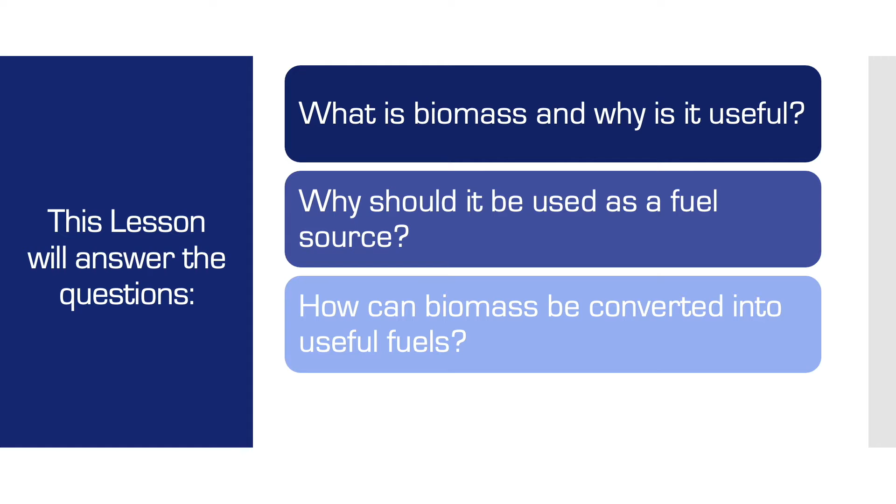This lesson will answer the questions: what is biomass and why is it useful? Why should it be used as a fuel source? And how can biomass be converted into useful fuels? Biochemical processes and thermal processes.

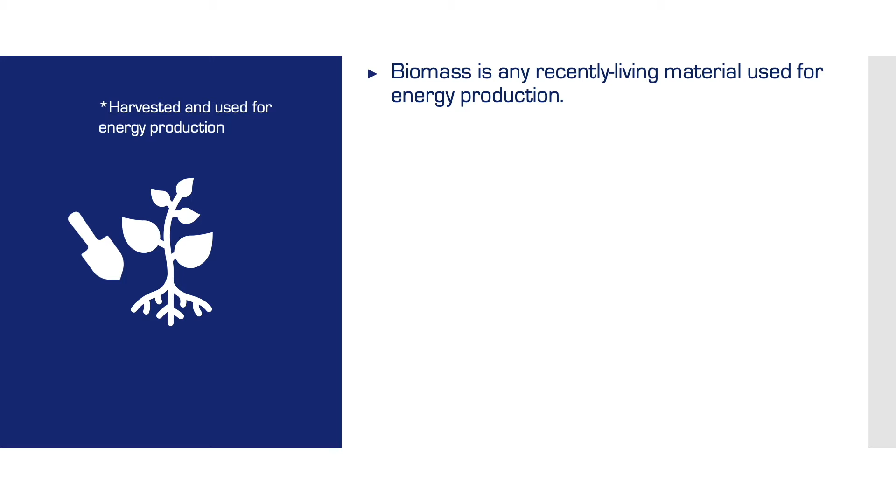So what is biomass and why is it useful? Biomass is any recently living material used for energy production. Biomass is considered a renewable resource.

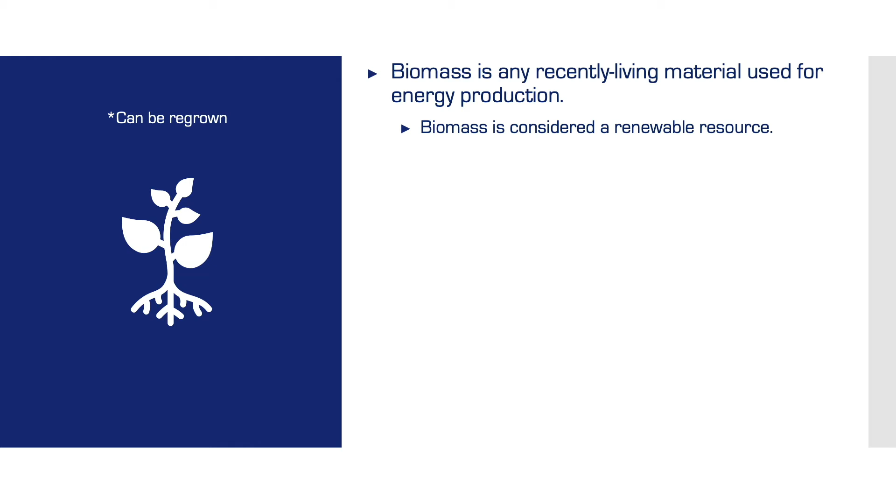Although fossil fuels come from once living sources, they are not considered biomass. This is because naturally occurring geological processes are needed to convert the ancient material into fossil fuels. Importantly, these processes are so slow that fossil fuels are not considered renewable.

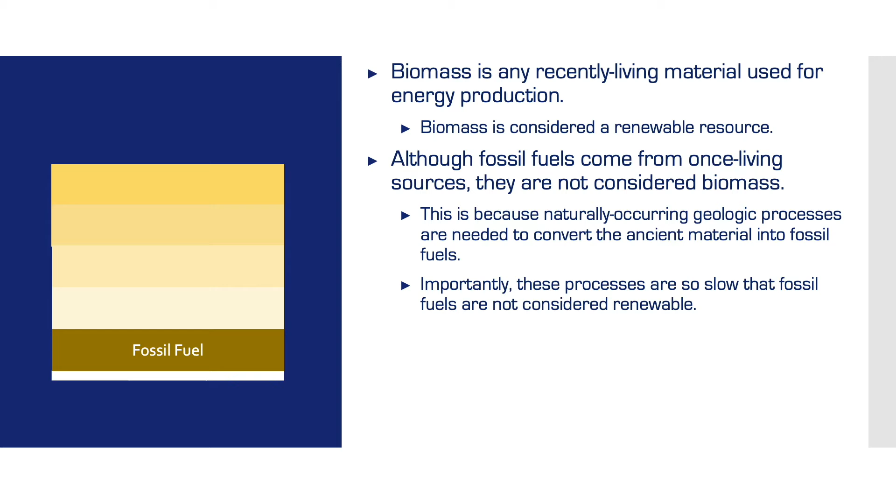Ultimately, biomass is a form of energy storage. Plants convert solar energy into chemical energy via photosynthesis. We can then convert that chemical energy into useful fuels.

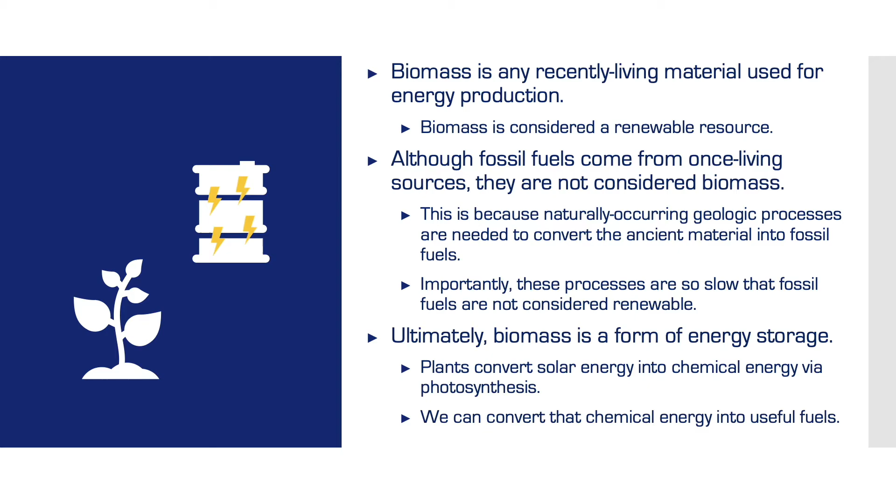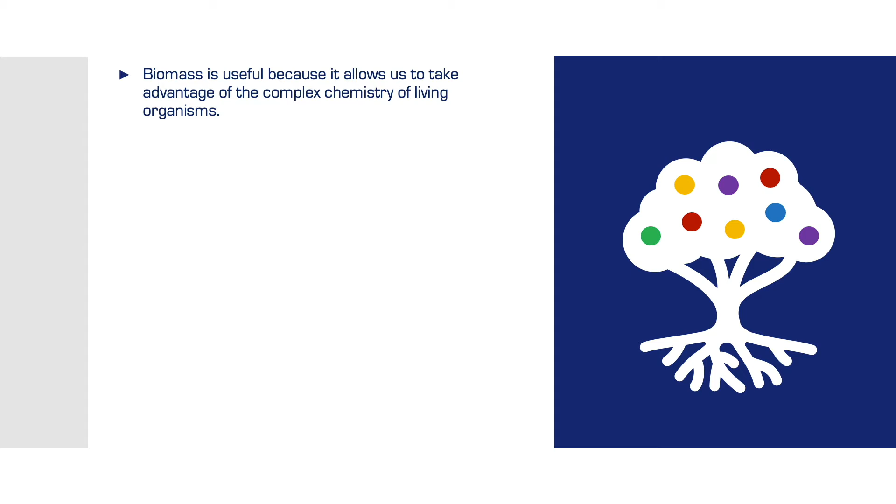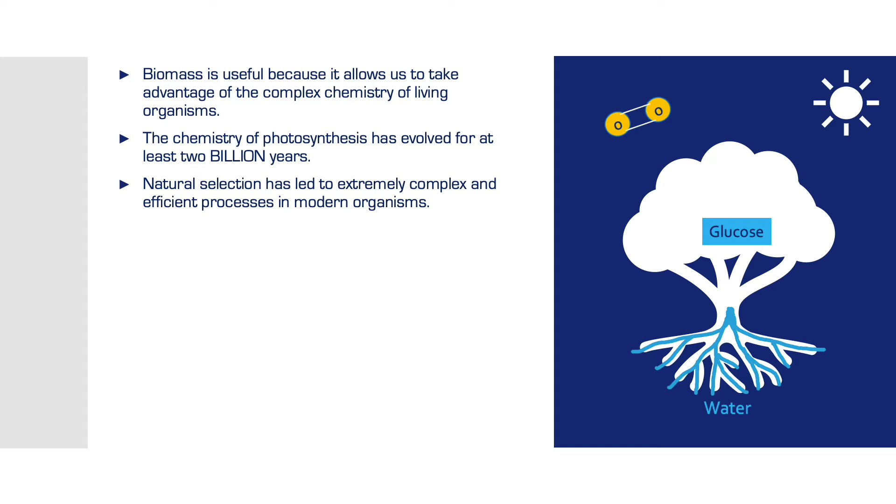Why should it be used as a fuel source? Biomass is useful because it allows us to take advantage of the complex chemistry of living organisms. The chemistry of photosynthesis has evolved for at least 2 billion years. Natural selection has led to extremely complex and efficient processes in modern organisms.

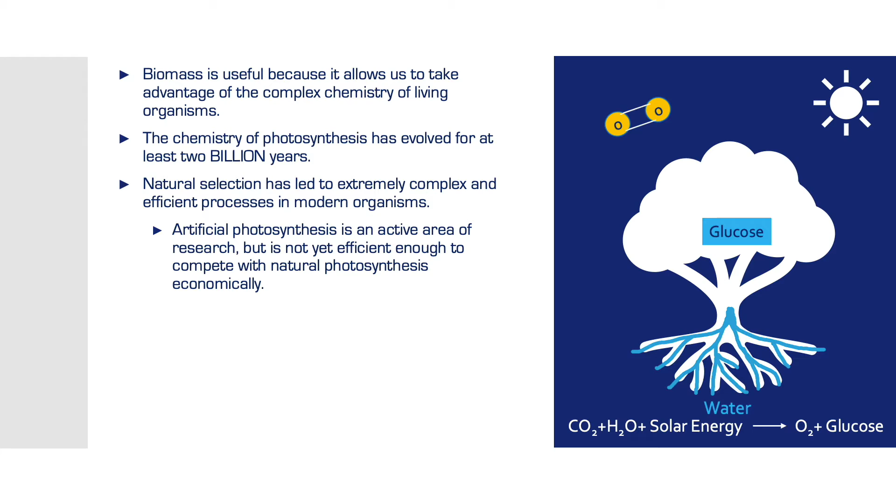Artificial photosynthesis is an active area of research, but is not yet efficient enough to compete with natural photosynthesis economically.

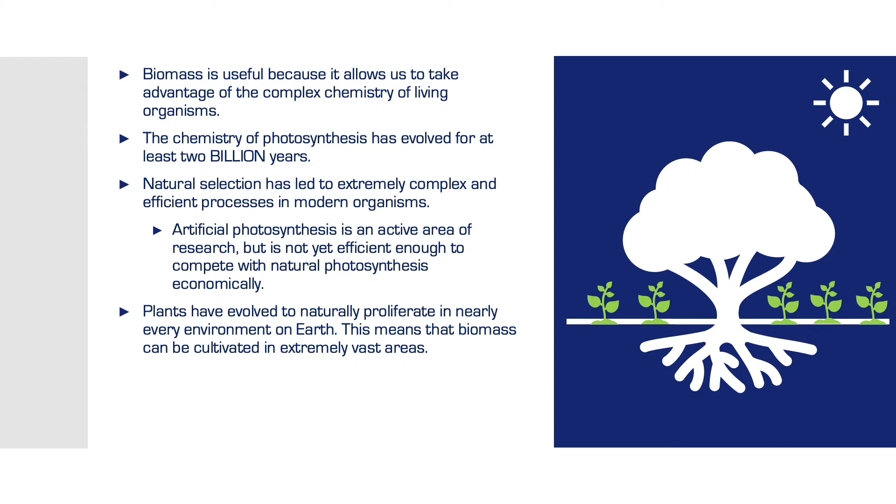Plants have evolved to naturally proliferate in nearly every environment on Earth. This means that biomass can be cultivated in extremely vast areas. The wide variety of plant life on Earth gives us a broad selection of plants to choose from to optimize the chemical composition of biomass.

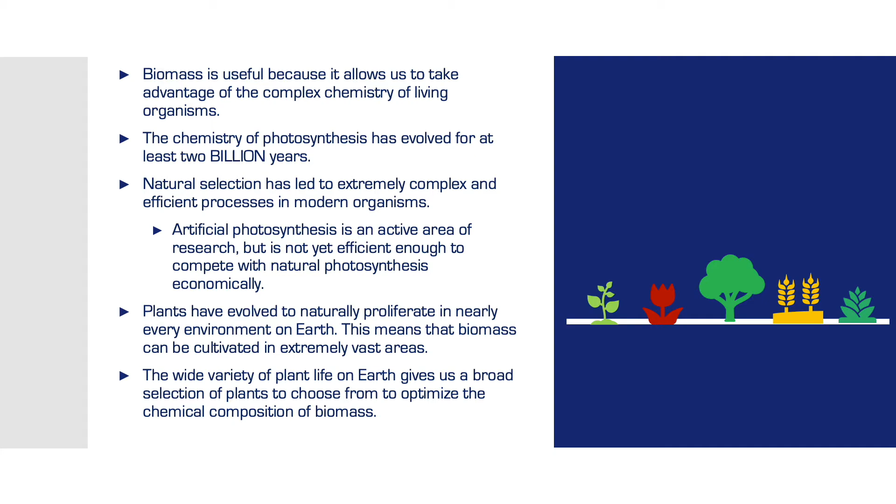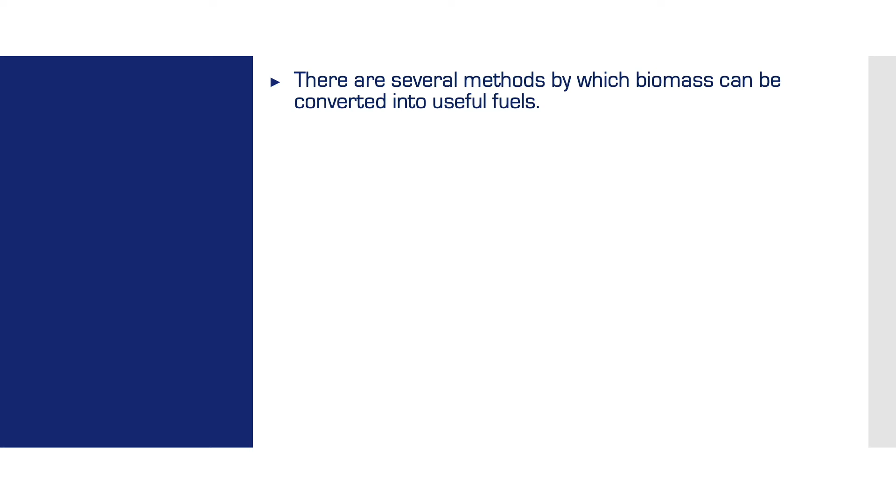So how can biomass be converted to useful fuels? There are several methods by which biomass can be converted into useful fuels. The simplest method is the oldest method: simply burn the biomass.

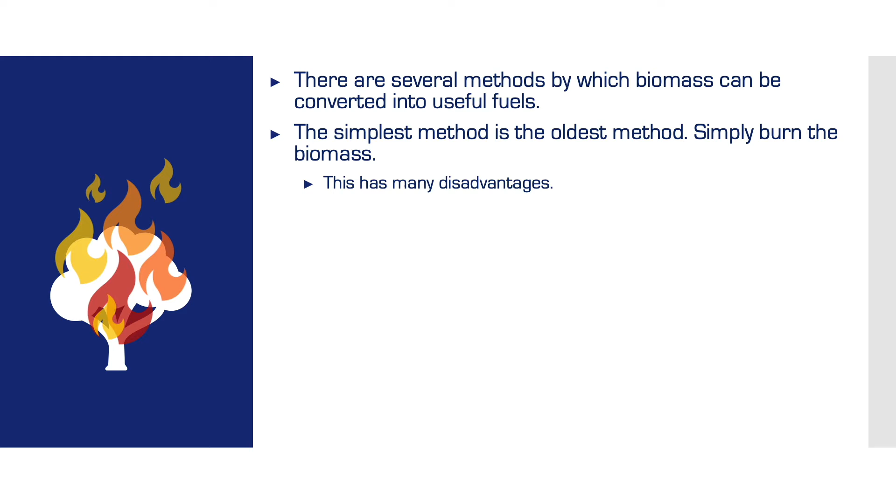This has many disadvantages. Biomass is a complex mixture of chemicals. Because of this, burning it produces many byproducts. These byproducts, categorized broadly as soot, are not only harmful environmentally, but can foul equipment.

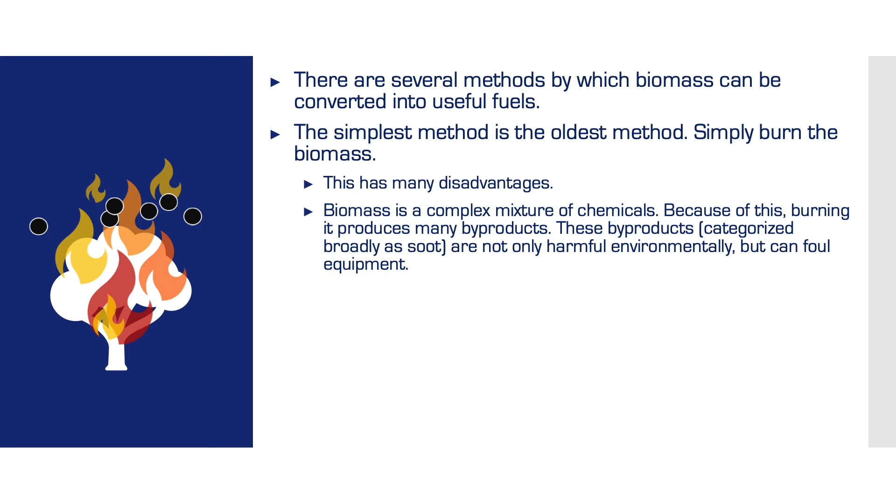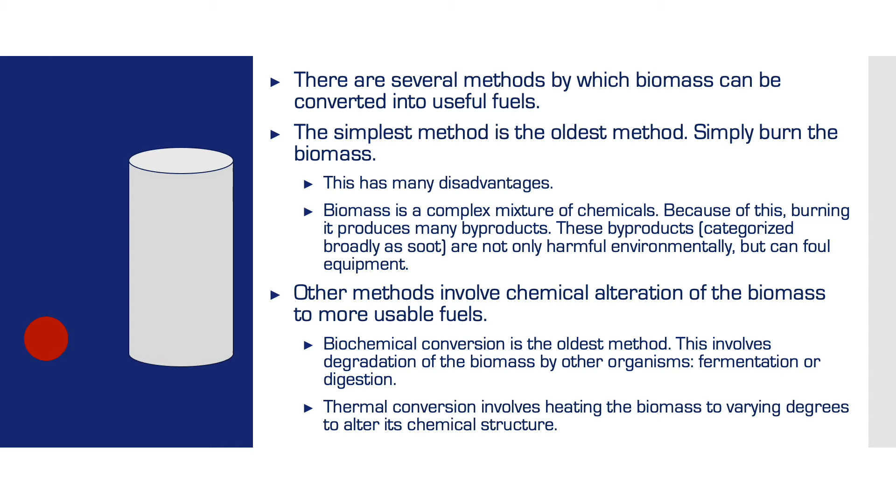Other methods involve chemical alterations of the biomass to more useful fuels. Biochemical conversion is the oldest method. This involves degradation of the biomass by other organisms, for fermentation or digestion. Thermal conversion involves heating the biomass to varying degrees to alter its chemical structure.

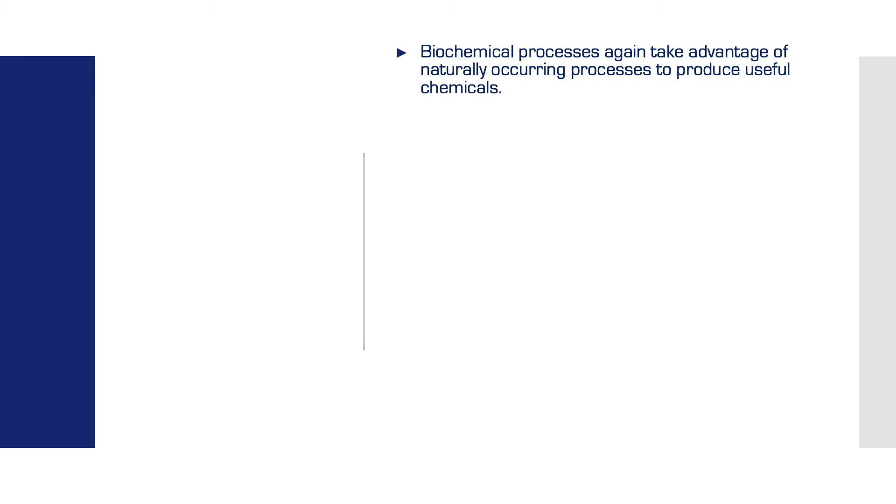Biomass processes. Biochemical processes again take advantage of the naturally occurring processes to produce useful chemicals. The simplest and oldest biochemical process is fermentation.

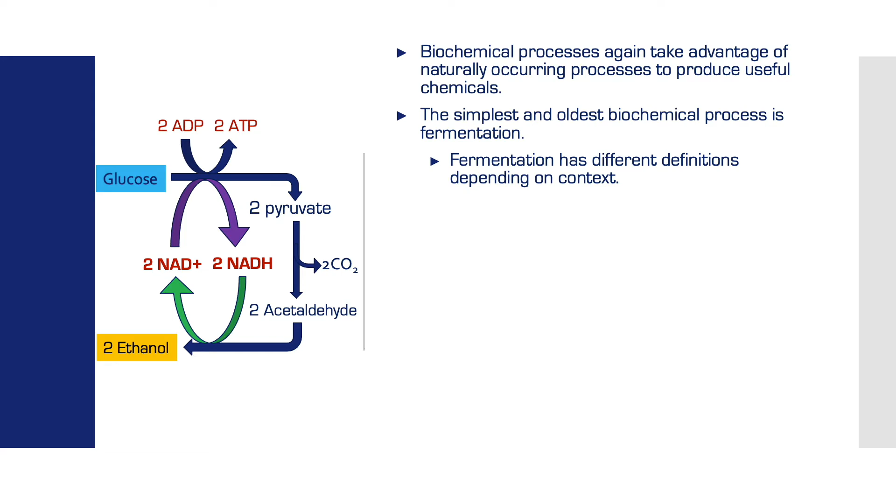Fermentation has different definitions depending on context. For the purposes here, fermentation is the anaerobic processing of carbohydrates by microorganisms.

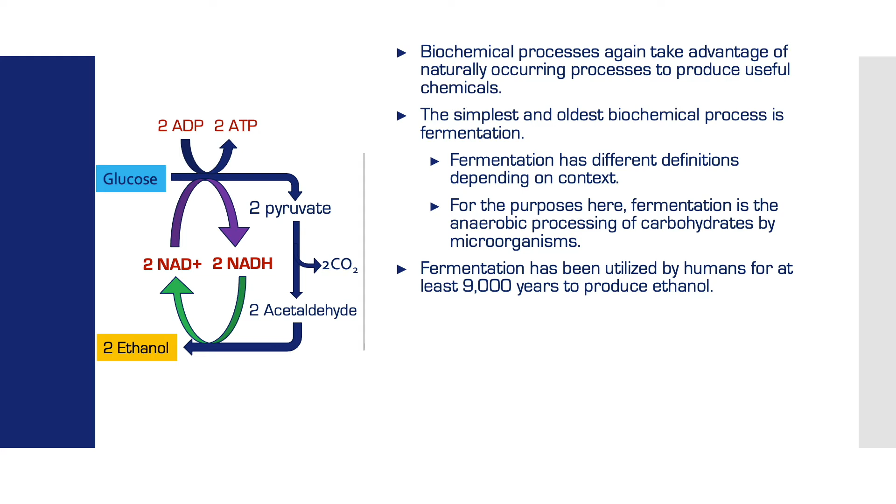Fermentation has been utilized by humans for at least 9,000 years to produce ethanol. Ethanol was consumed directly as a beverage instead of being used as a fuel. Typically, yeast consumed carbohydrates, usually sugars, to produce ethanol and carbon dioxide.

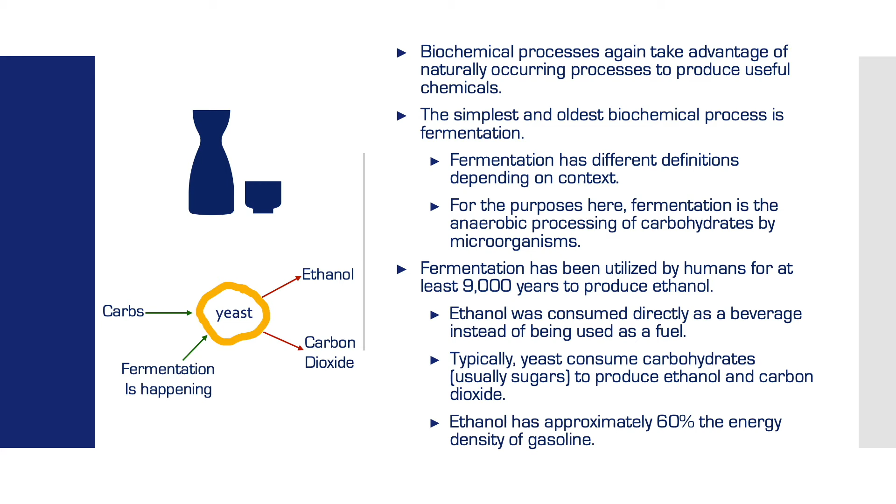Ethanol has approximately 60% the energy density of gasoline.

Industrially, sugar-rich plants are harvested and processed to allow optimal access to sugars. In the United States, this is typically done with corn. There are two methods for processing corn.

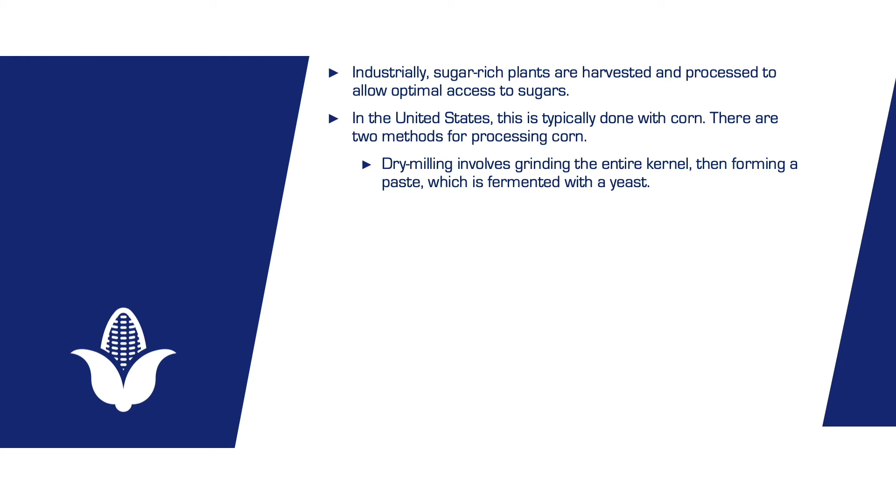Dry milling involves grinding the entire kernel, then forming a paste, which is fermented with yeast.

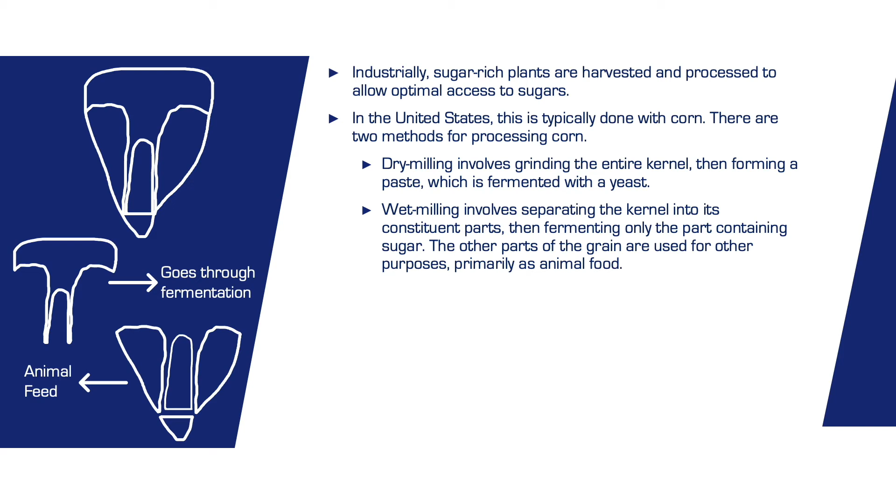Wet milling involves separating the kernel into constituent parts, then fermenting only the part containing sugar. The other parts of the grain are used for other purposes, primarily as animal food.

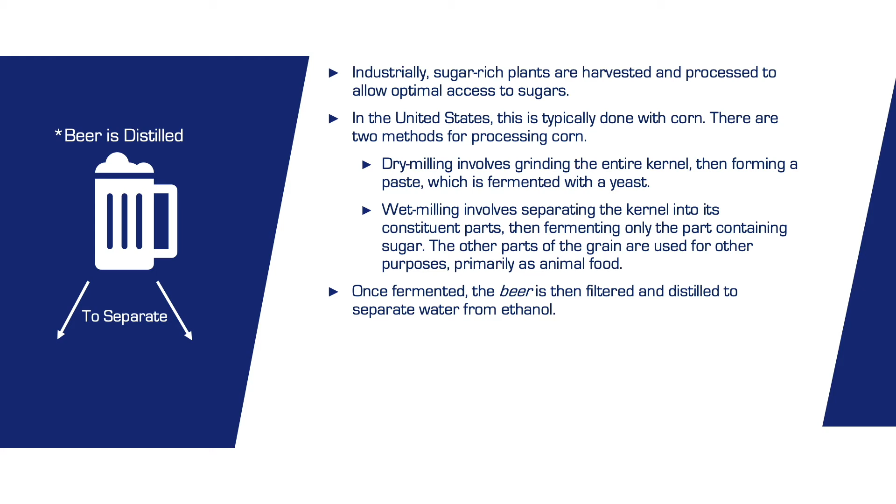Once fermented, the beer is then filtered and distilled to separate water from ethanol. Distillation is an extremely common chemical process that separates chemicals based on the differences in their boiling points.

Ethanol and water form an azeotrope, which limits the purity achievable by distillation. Ethanol cannot be distilled beyond 95% ethanol.

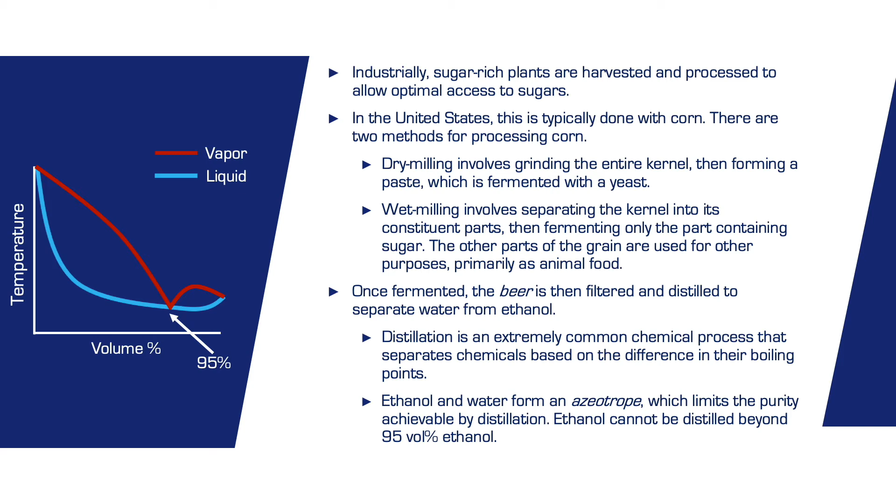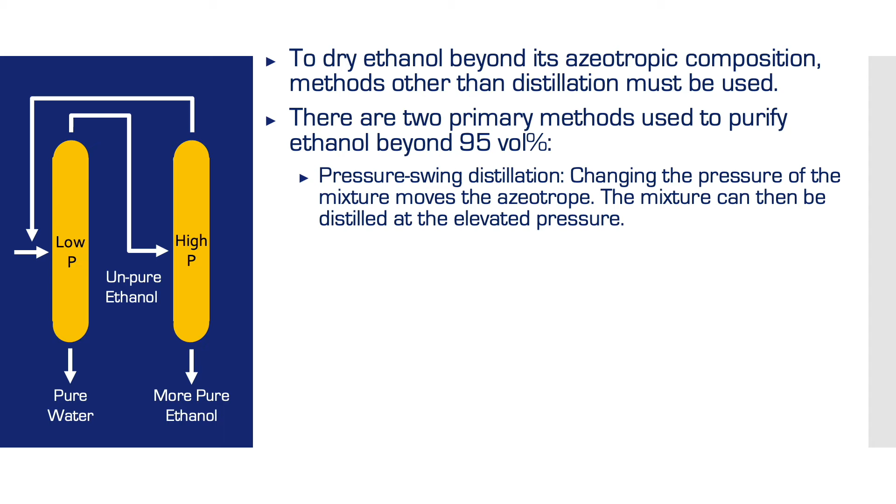To dry ethanol beyond its azeotropic composition, methods other than distillation must be used. There are two primary methods used to purify ethanol beyond 95%. The first is pressure swing distillation: changing the pressure of the mixture moves the azeotrope, and the mixture can then be distilled at the elevated pressure.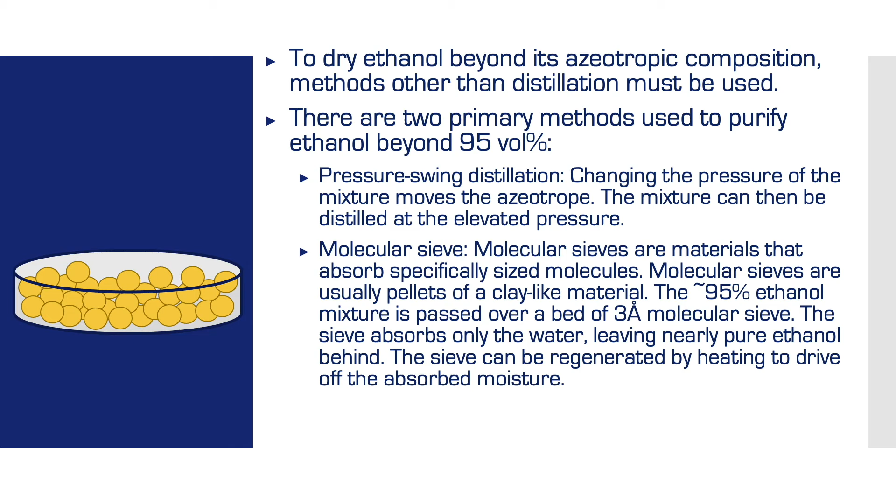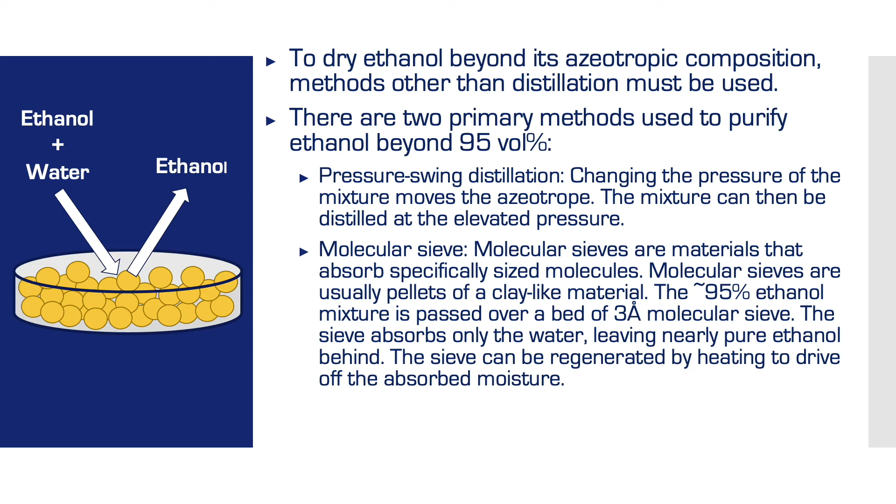The second method is molecular sieves, materials that absorb specifically sized molecules, usually pellets of clay-like material. The approximately 95% ethanol mixture is passed over a bed of molecular sieve, which absorbs only water, leaving nearly pure ethanol behind. The sieve can be regenerated by heating to drive off the absorbed moisture. Once purified, ethanol can be blended with gasoline to be used in existing cars.

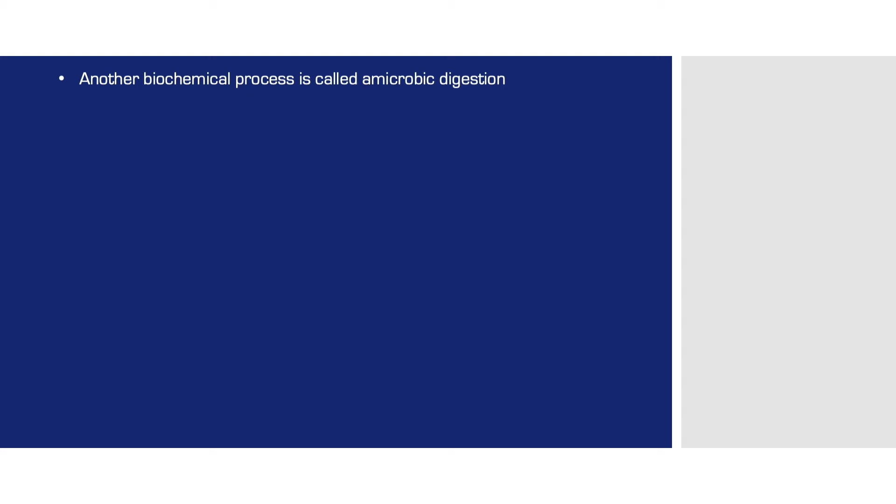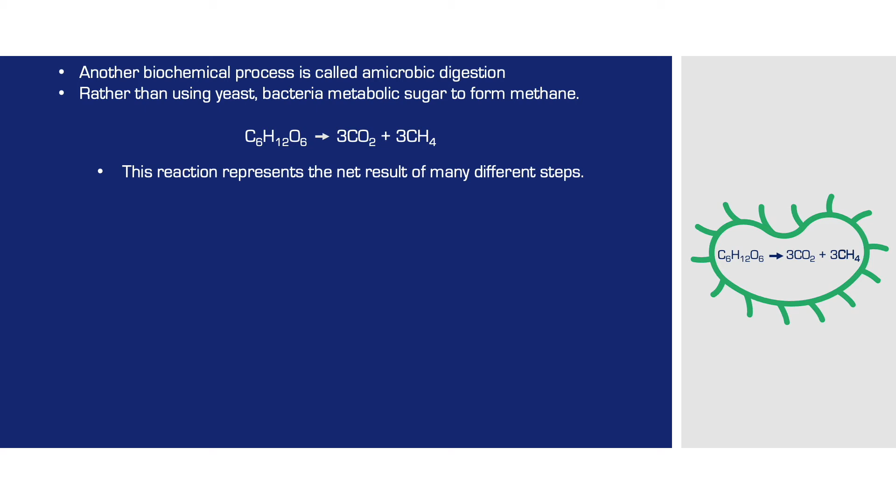Another biochemical process is called anaerobic digestion. Rather than using yeast, bacteria metabolize sugar to form methane. This reaction represents the net result of many different steps. Once methane is formed, any of the existing processes used for reforming methane gas can be used.

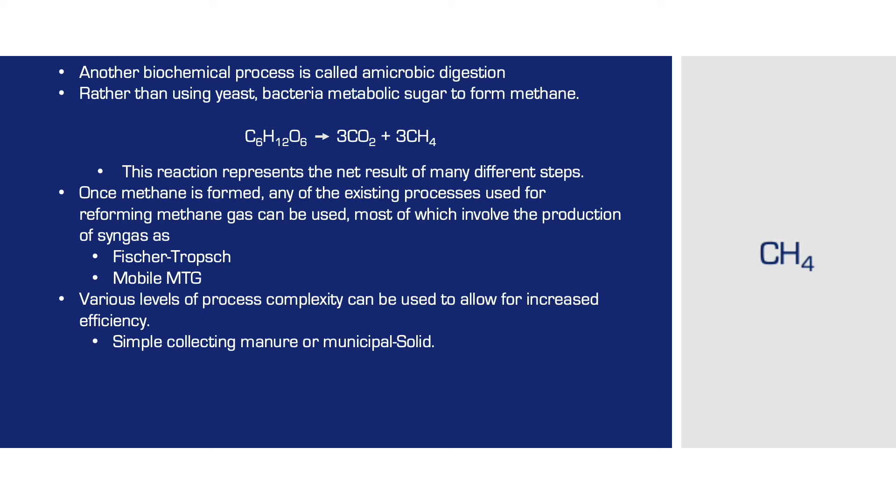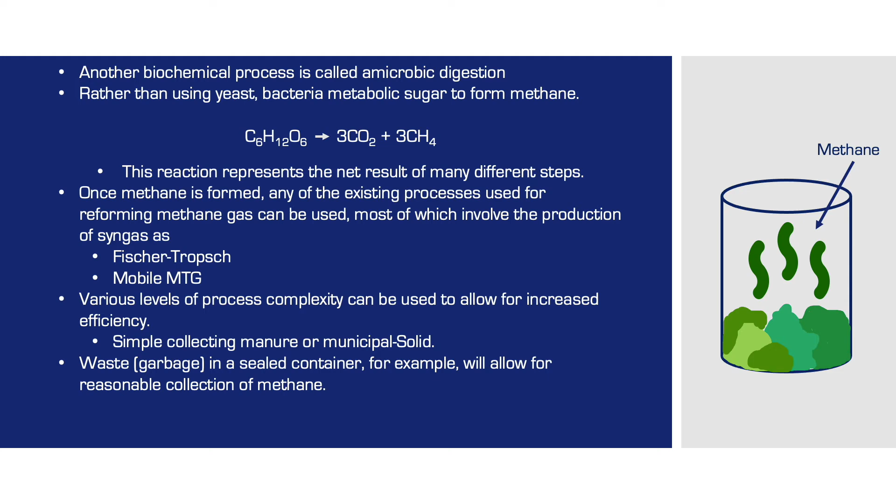Most of these processes involve the production of syngas, as in Fischer-Tropsch and Mobil's MTG. Various levels of process complexity can be used to allow for increased efficiency. Simply collecting manure or municipal solid waste in a sealed container, for example, will allow for reasonable collection of methane. Controlling for composition, density of material, pH, etc., will allow for more rapid production of methane via anaerobic digestion.

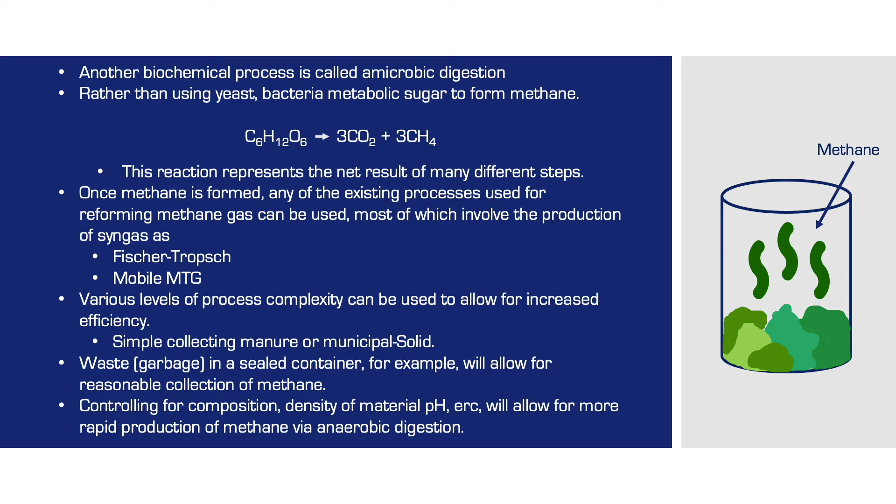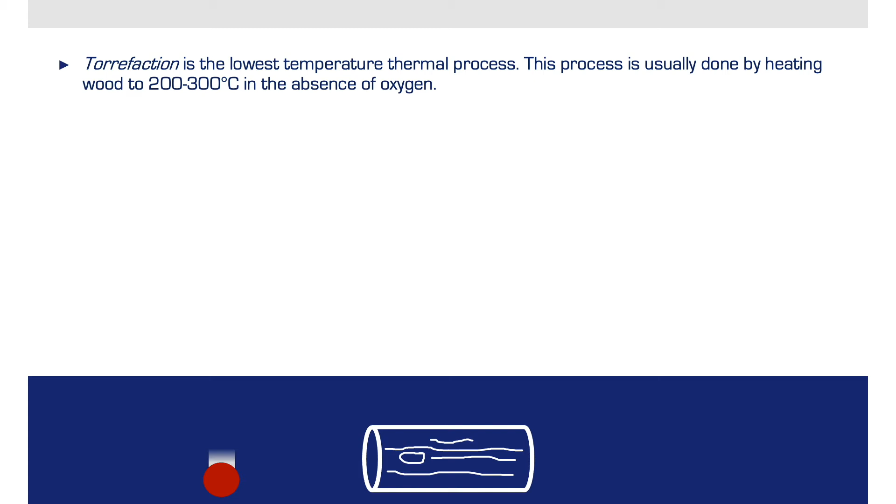Thermal processes. Torrefaction is the lowest temperature thermal process, usually done by heating wood to 200 to 300 degrees Celsius in the absence of oxygen. Volatiles like hydrogen, methane, and water are driven off. The products are usually ground to a fine powder and pressed into pellets or briquettes, increasing the energy density of the material. These can then be burned in furnaces.

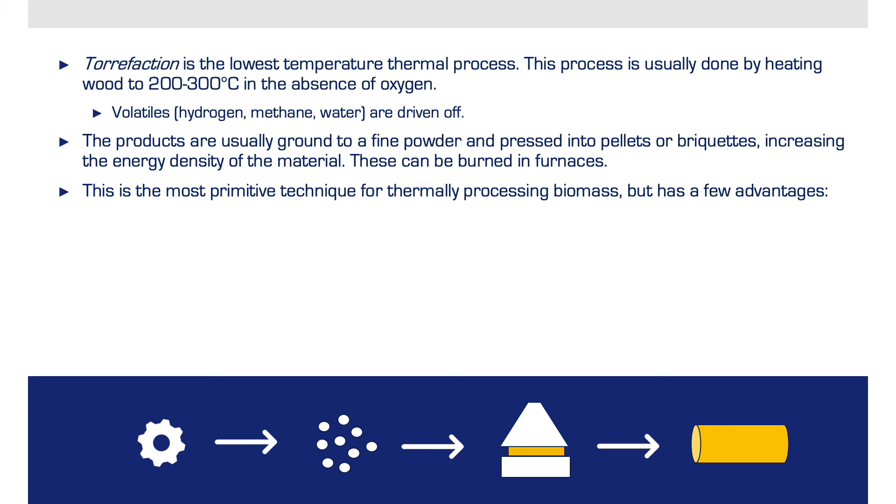This is the most primitive technique for thermally processing biomass, but has a few advantages. The material is made homogeneous. The material is sterilized, stopping any biological processes or rot. The material is made hydrophobic, allowing it to be stored in humid conditions. And the energy density is increased.

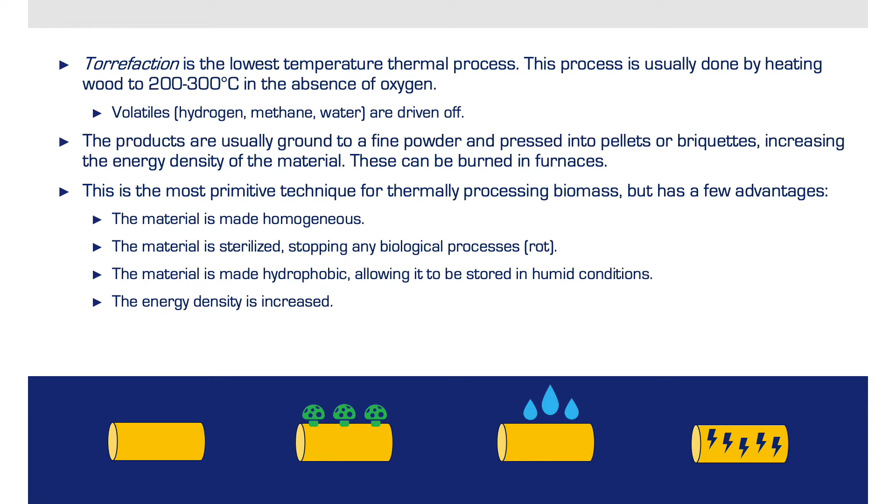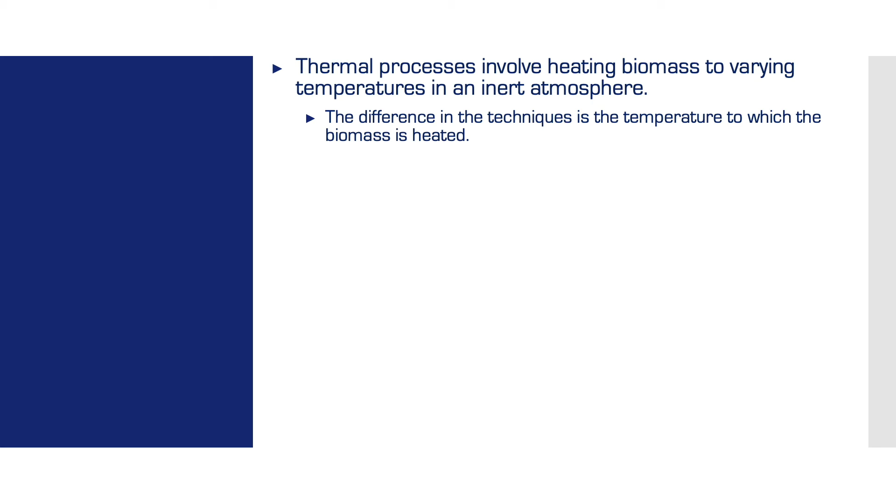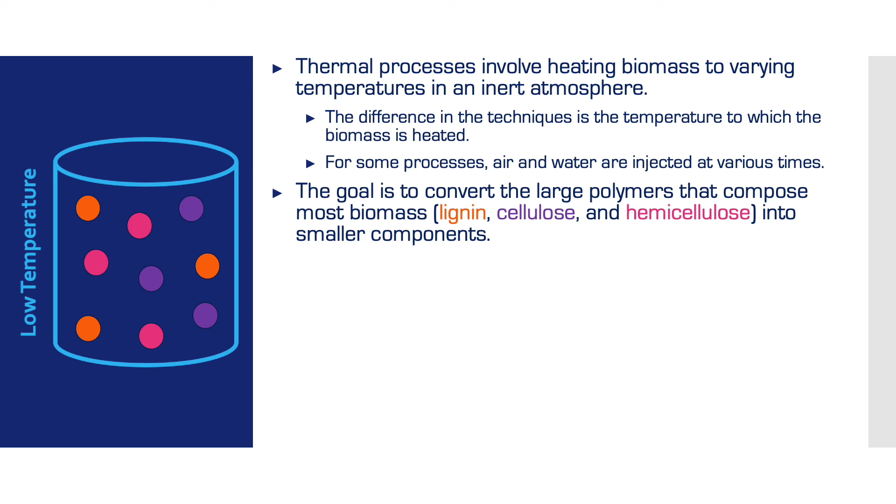Thermal processes involve heating biomass to varying temperatures in an inert atmosphere. The difference in the techniques is the temperature to which the biomass is heated. For some processes, air and water are injected at various times. The goal is to convert the large polymers that compose most biomass—lignin, cellulose, and hemicellulose—into smaller components. Heating to higher temperatures breaks the polymers down into smaller molecules. The three main thermal processes, in order of increasing temperature, are torrefaction, pyrolysis, and gasification.

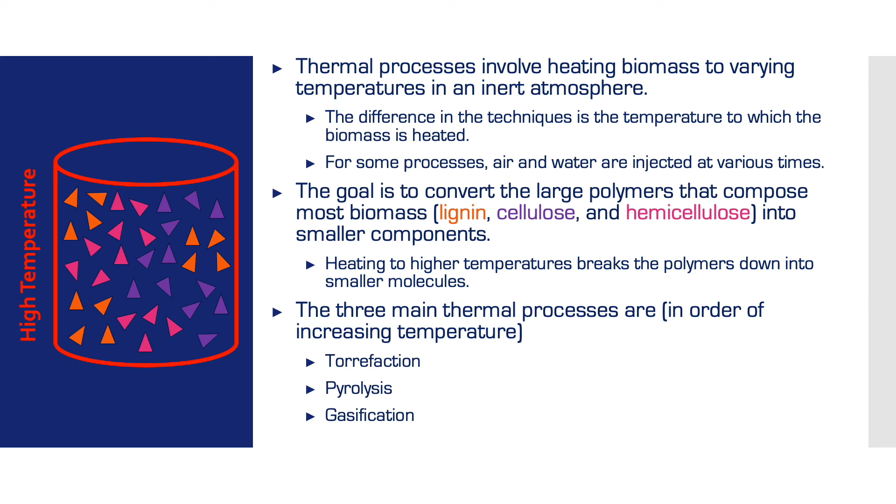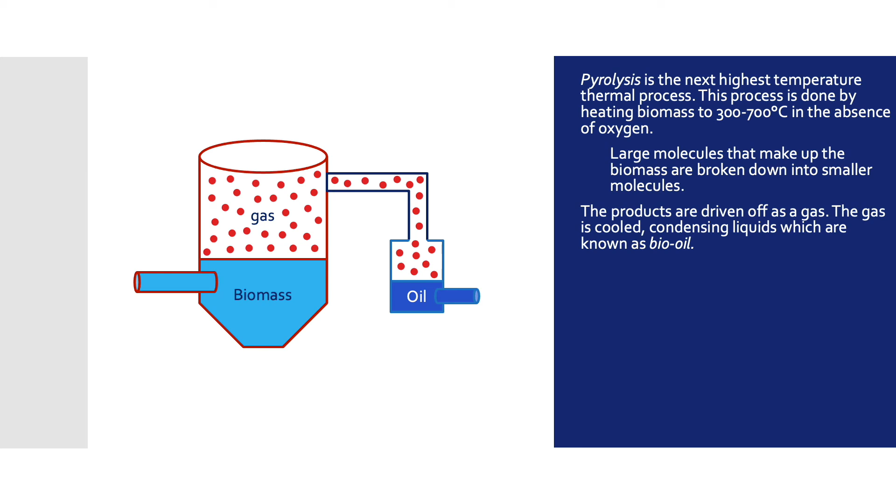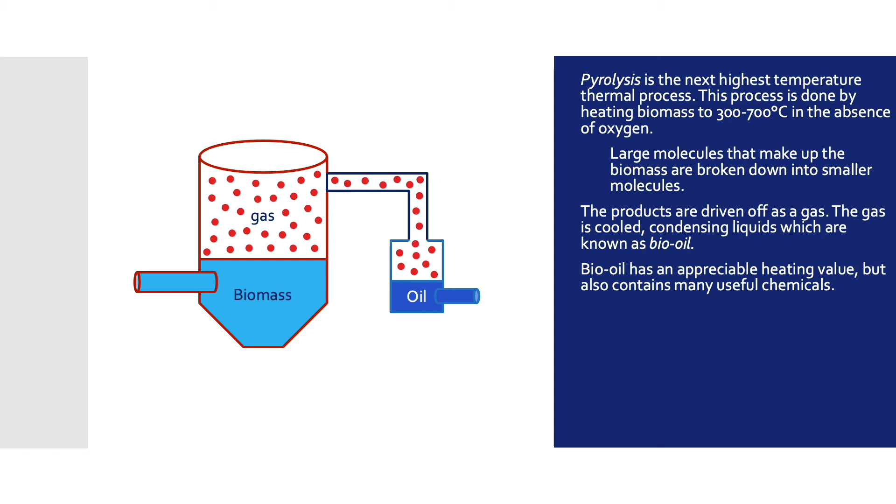Pyrolysis is the next highest temperature thermal process, done by heating biomass to 300 to 700 degrees Celsius in the absence of oxygen. Large molecules that make up the biomass are broken down into smaller molecules. The products are driven off as gas. The gas is cooled, condensing liquids which are known as bio-oil. Bio-oil has an appreciable heating value but also contains many useful chemicals.

Reducing moisture content of bio-oil increases the heating value further. Separating bio-oil into its constituents dramatically increases its value. Hydrocarbons, phenols, ketones, and other alcohols are valuable chemicals that can be extracted from bio-oil.

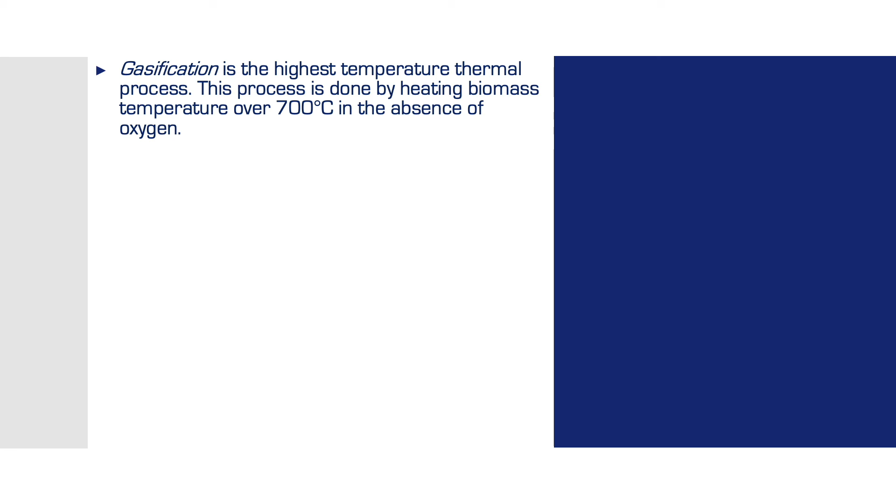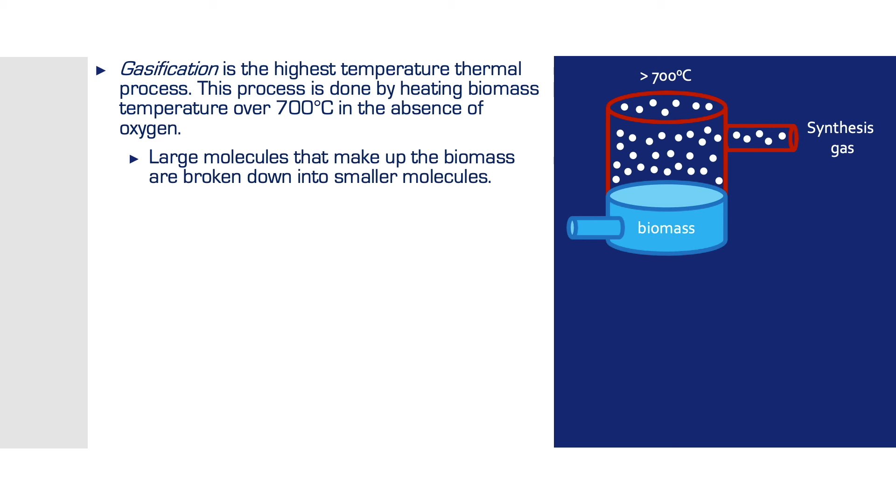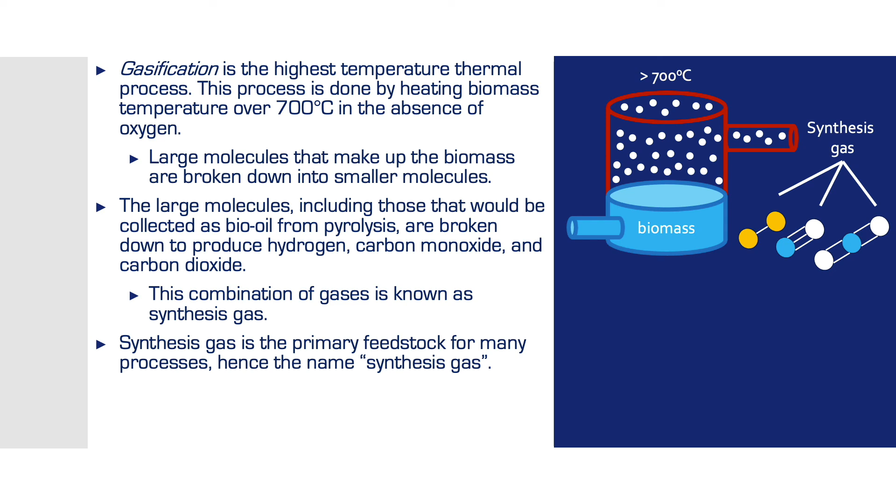Gasification is the highest temperature thermal process, done by heating biomass to temperatures over 700 degrees Celsius in the absence of oxygen. Large molecules that make up the biomass are broken down into smaller molecules. The large molecules, including those that would be collected as bio-oil from pyrolysis, are broken down to produce hydrogen, carbon monoxide, and carbon dioxide. This combination of gases is known as synthesis gas. Synthesis gas is the primary feedstock for many processes, hence the name synthesis gas. Potential fuels from syngas include diesel-like fuels and gasoline.

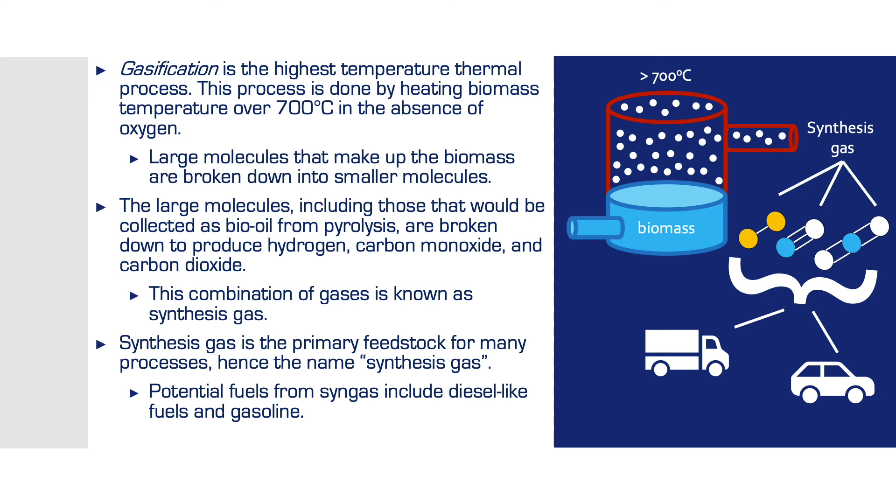So what did we learn today? Biomass is likely to be an important part of the energy portfolio of the future. Natural processes, including photosynthesis, produce complex chemicals while removing carbon dioxide from the atmosphere. These complex chemicals can be biochemically processed to produce ethanol or methane.

Biomass can also be thermally processed to produce one of several fuels: torrefied biomass for use in furnaces, bio-oil for further processing into many different chemicals, and syngas for further processing into many different fuels such as gasoline or diesel fuel. And finally, since the carbon produced during the combustion of biofuels came from the atmosphere as carbon dioxide originally, these renewable fuels are also carbon neutral.